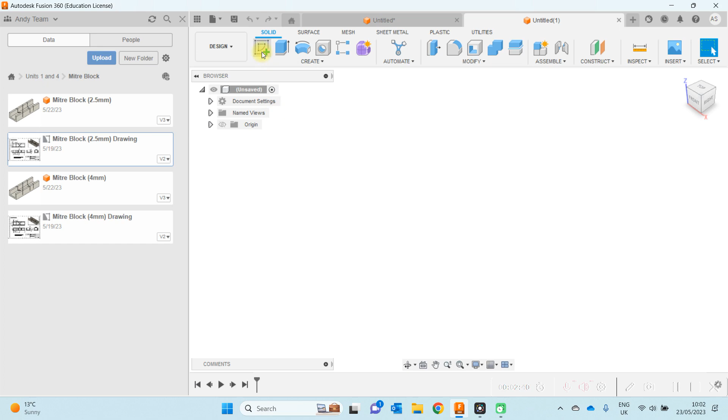So the very first step then is to create a sketch of the front face of our mitre block. We need to choose a plane to sketch on. With reference to the drawing, I know that the front face needs to be 300 millimeters long by 60 millimeters deep. So I'm going to sketch that now.

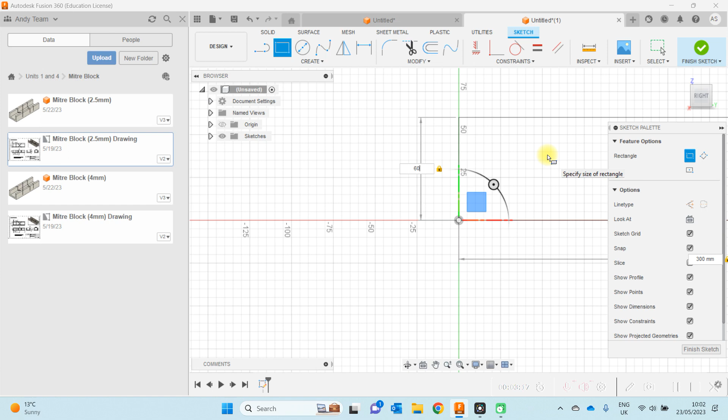As you'll notice, the dimension at the bottom, or the length, is currently highlighted, so that means I can edit that. I'm going to type 300 for my length, hit the tab key, and type 60 millimeters for my height. Now when I hit enter, that sketch is fixed in space.

I'm going to click Finish Sketch, and I'm also going to click the Fit to Screen icon down at the bottom here.

Next, I need to extrude the block through its depth. Once again, with reference to the drawing, I know that the depth of the mitre block is 95 millimeters, so I'm going to use the Extrude tool.

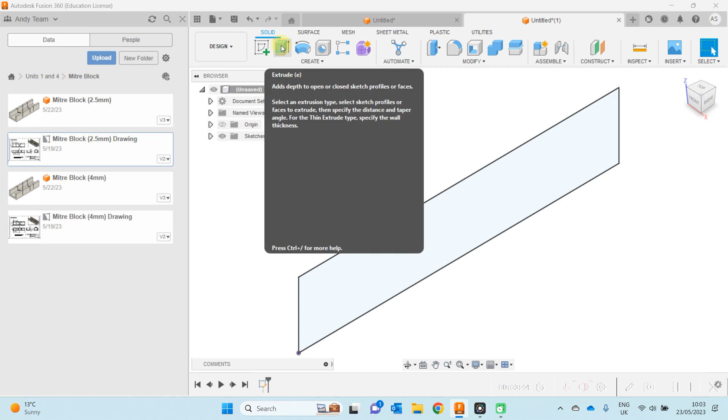The outline of my sketch is highlighted, but if it wasn't highlighted, then all I need to do is click that sketch, making sure that the full area has been highlighted. Once again, my measurement is highlighted here. I can either drag my arrow, or I can simply type the value, 95 millimeters, into the box.

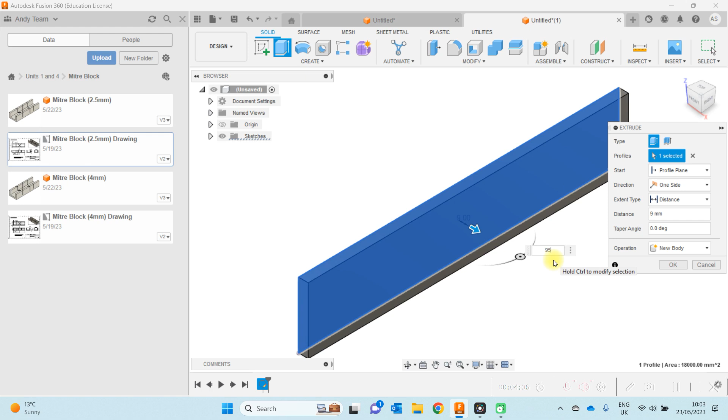Now I have the general outline for my mitre block. I'm creating a new body, and I click OK. Once again, let's fit that to screen, and we have the outside geometry for our mitre block.

Now, as with anything in CAD, there's always more than one way to produce the same component, so I'm demonstrating how I would approach this task. If you're working from the drawing, you may well be able to approach this in a different way and still achieve the same outcome. So within our mitre block, we have a cutout, and the cutout comes out of the centre of the block like so.

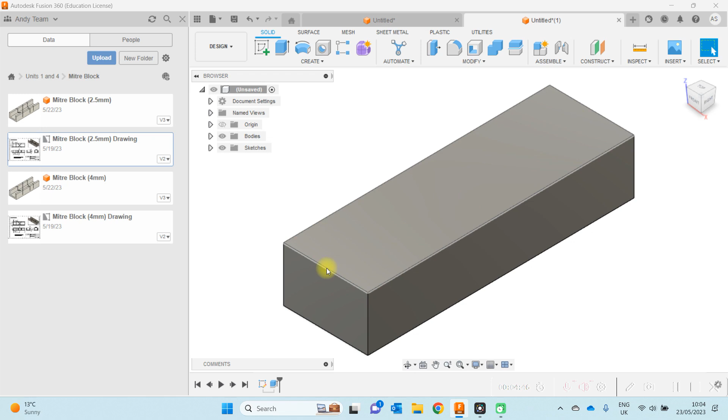So what I'm going to do to create this is I'm going to sketch on the top face this time. I'm going to specify Create Sketch, and select the top face of my geometry. Notice that the geometry has been reorientated in order for me to sketch on that plane. So I'm also going to fit to screen once again.

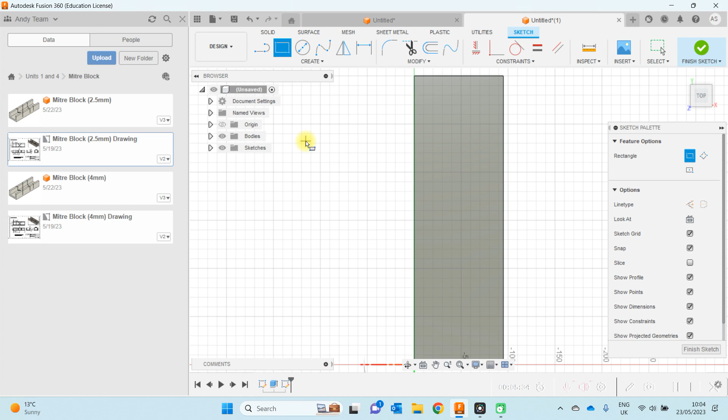So I'm going to create a rectangular sketch on the top surface, but at this point I'm not going to specify any dimensions. I'm going to click my first point, and I'm going to click my second point. If you need to pan the drawing, you can do so, and hitting Escape will take you back to defining the second corner of your rectangle.

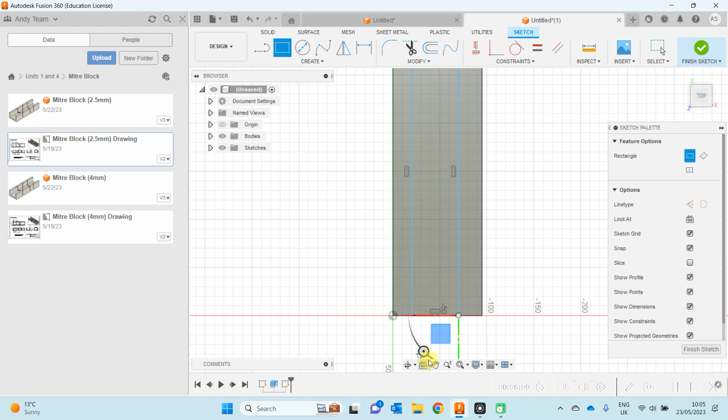So at this moment in time, this rectangle is underdefined. We need to specify some dimensions to fix this in space. Fusion knows that we've snapped to this edge here, and to this edge here, but it doesn't know the width or the position of the rectangle.

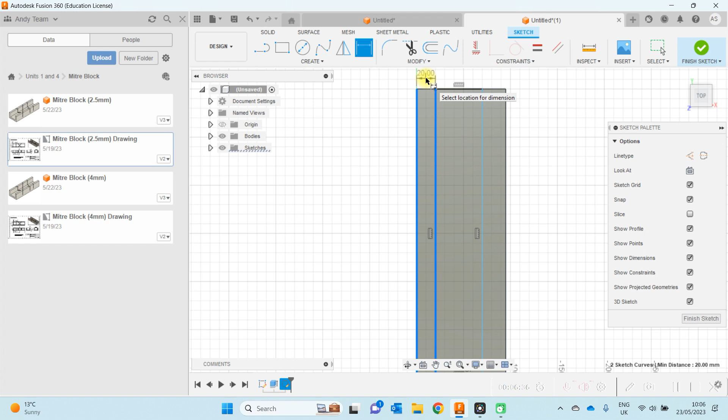Hitting Escape again to move out of the Pan tool, I'm going to select my Dimension tool. With reference to the drawing again, we know that the distance from the rectangle edge here to the outside of the block is 15 millimeters. So I'm going to place my dimension, and once I left click to place my dimension, I have the option to type in the value of that dimension, and you'll notice that the sketch is updated accordingly.

Now I'm going to do exactly the same on the other side. I've selected my dimension tool, selected the edge of the rectangle, selected the outside of the block, positioned my dimension, and typed the value of 15. So now we have a fully defined rectangle in order to perform our cut operation.

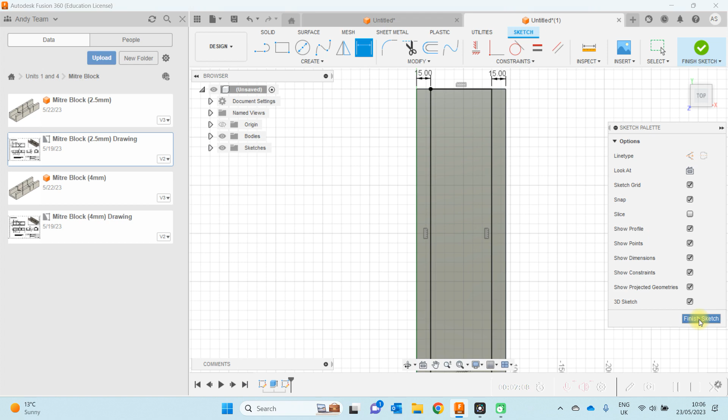I'm going to finish the sketch, and rotate or orbit my object slightly so I can visually see the rectangle on the top face. Then I'm going to select my extrude option once again, and select the sketch that I've just produced.

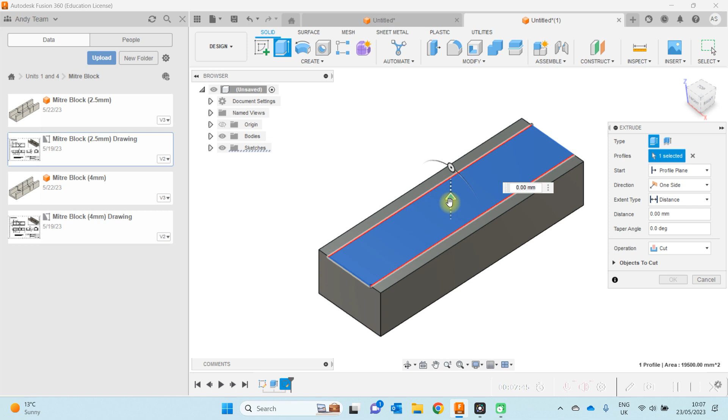The important point to note here is that this extrude function needs to be a cut, so it needs to cut into the object and remove material from our block. So rather than new body, I'm going to specify cut. I also need to make sure that rather than the arrow pointing upwards, it points downwards, so I'll drag down into my object. You can see from the preview that this is going to remove material from the block.

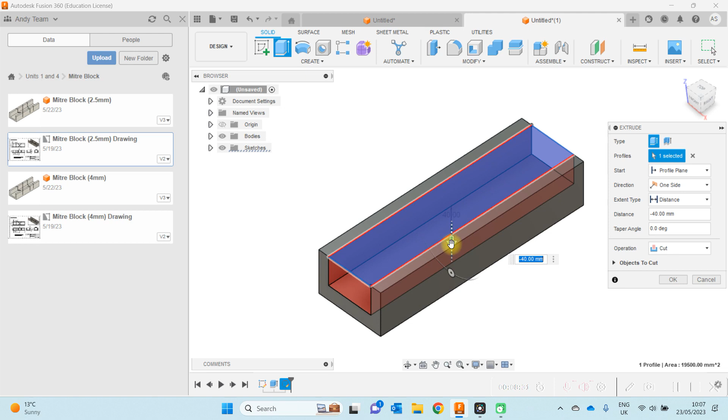I still need to specify my depth. With reference to my drawing, I can see that this depth needs to be 40 millimeters. But notice there's a minus sign at the start of this dimension - if the arrow was pointing upwards, the dimension is positive, but downwards is negative. So when we specify this dimension, we need to put minus 40 rather than just 40.

Now when we click OK, we can see that our new object has that section of material removed. The next stage is to include our cutouts, and the cutouts are where a saw would pass through in order to achieve 90-degree and 45-degree cuts.

There's a number of different ways to achieve this, but I'm going to perform a cut on my top surface. So I'm going to specify sketch, select one of either of the two top surfaces - it won't matter which - and fit to screen once again.

Now we're just going to do one of these cuts at a time. There's 3 cuts in total, but we'll do one at a time so we can practice the operation. I'm going to start with the insert for a 90-degree cut, as that's the most straightforward. So I'm going to select my rectangle tool again, and pick an arbitrary start point and an arbitrary end point.

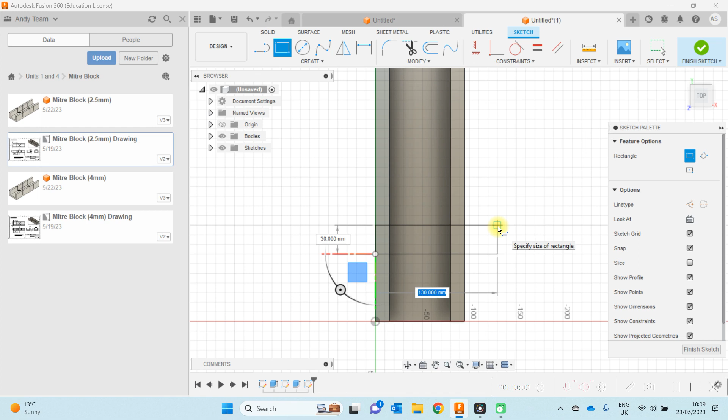At the moment the position of this rectangle isn't defined, but I know from my drawing that the first edge of the cutout, which is going to receive the saw, is positioned 73 millimeters from this leading edge. So my first dimension goes from the corner of the block to the corner of the rectangle. At present that is specified as 30 mil, but I need that to be 73 millimeters.

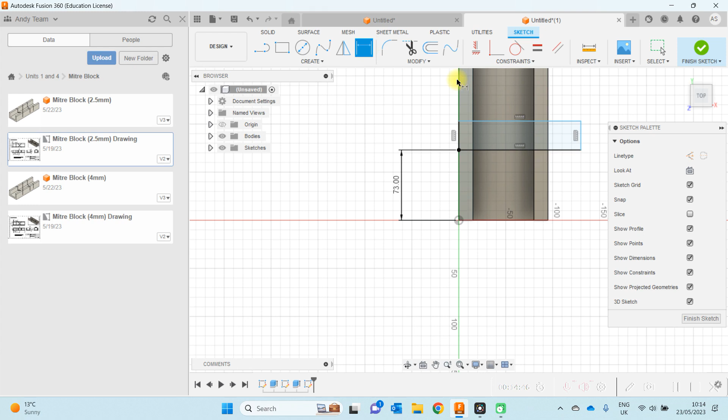I also know that the thickness of the slot is 2 millimeters. So once again I use my dimension tool, select the first edge of the rectangle, the second edge of the rectangle, place my dimension, and change that to 2 millimeters. Now if I wanted, I could specify the position of this corner of the rectangle or the overall length of the rectangle, but as I'm going to use this to cut through the part, there isn't any benefit in doing that at this stage - you'll see why as we continue this video.

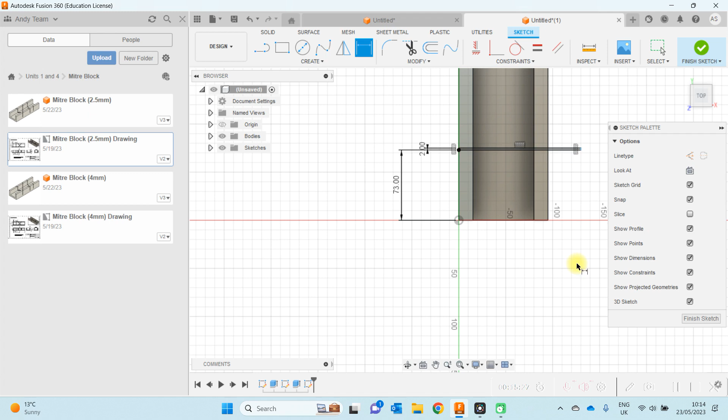So let's finish our sketch. Let's orbit this object so we can see the top surface and the rectangle we're going to use for cutting the object. We're going to extrude, and select the rectangle for cutting. Notice here that part of the rectangle is being cut off because it's intersected by the edge of our block, so we need to make sure we select both of those rectangles.

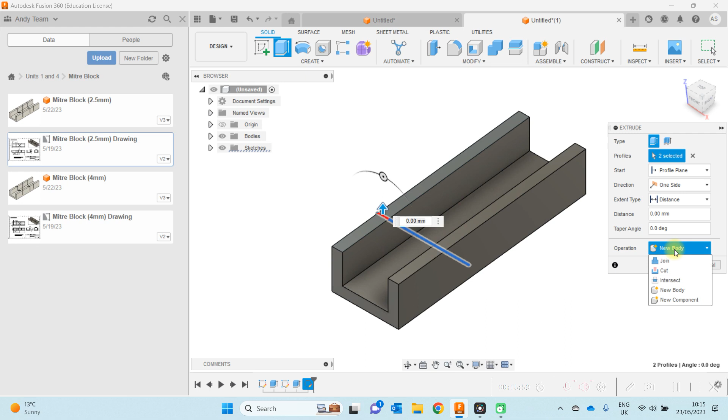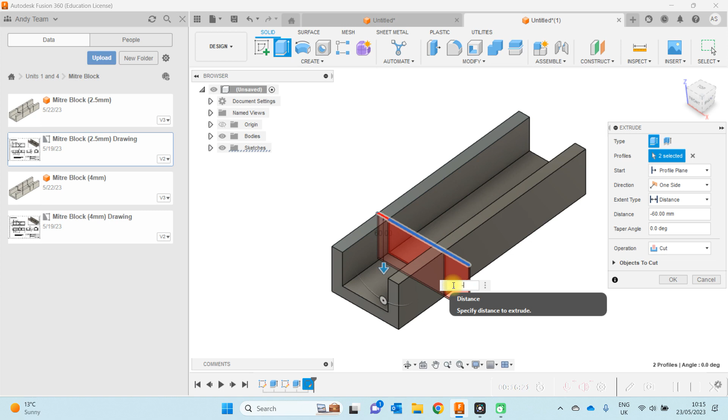We know we're using this for a cut operation, so we change from new body to cut. We're also going to drag our arrow downwards so we get a visual representation of how that cut's going to be performed. Now I know from the drawing that the cut depth needs to be 47 millimeters, but notice once again that we have a minus because we're cutting into the object. So I'm going to change that to minus 47, and click OK.

And now if we orbit that object, we can see that the cut is the full way through the block, as well as leaving an impression of 2 millimeters on the bottom surface. We have 2 more cuts to perform.

We need a 45-degree cut that goes across the block in this direction, and a 45-degree cut that goes across the block in this direction, and those 2 cuts are going to cross in the very center of this face.

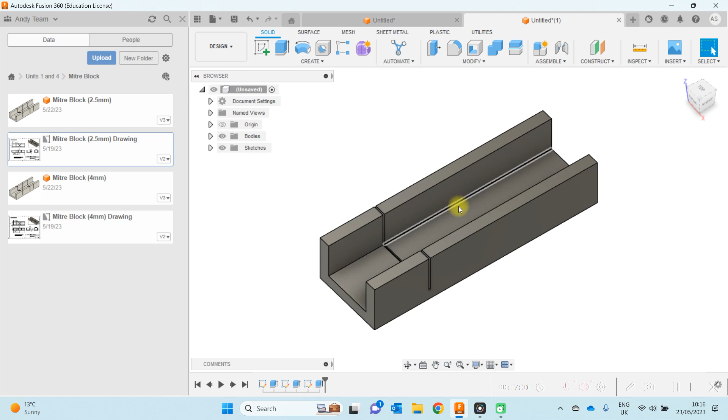Once again there's lots of different ways to do this, but I'm going to choose to sketch on the top face once again. So create sketch - we could either pick this top face here or this top face here. I'm going to pick this top face, then fit to screen.

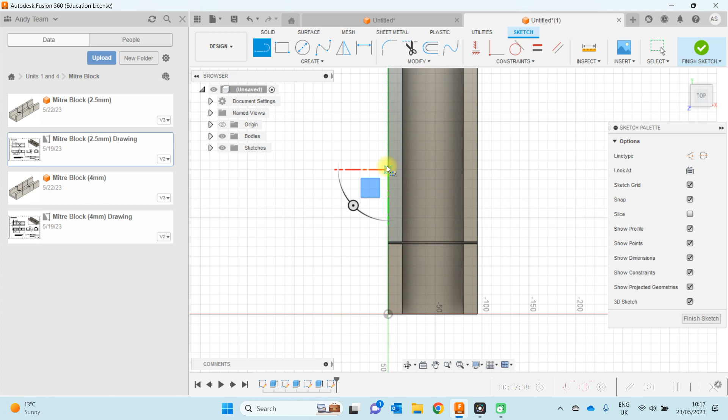Now we can go ahead and draw our 45-degree cut. For this cut, I'm going to use the line tool, placing my first point and then my second point. As we do this, we notice we have a length specified, in this instance 150 mm. If I tab, we also get an angle. We could work out exactly what angle is needed for 45 degrees, or dimension it afterwards. So let's draw the line, and again I'll draw it oversized.

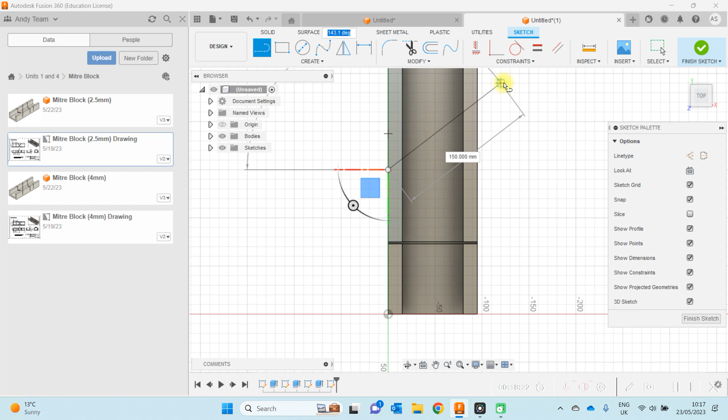I'm going to hit escape to come out of the line tool, and add a dimension to specify that angle. I can choose the edge of the block and the line, and we know this needs to be 45 degrees. So let's place our dimension, 45, and enter.

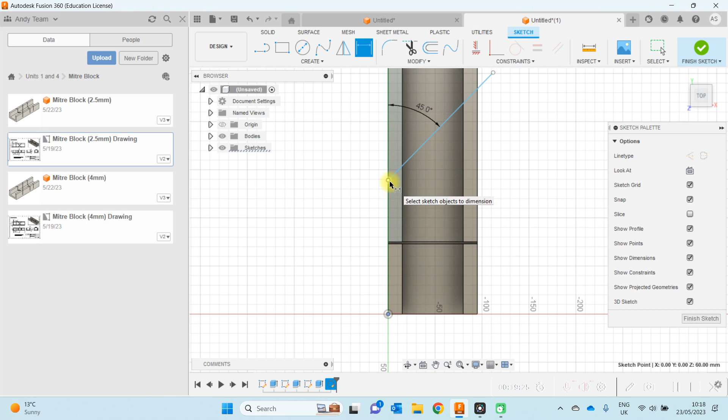The other dimension we know from the drawing is that the start of this cutout needs to be 120 mm from the leading edge of our mitre block. So let's add that dimension, going from the corner of the block to the line, at 120 mm. That first line of the cutout is now fully defined.

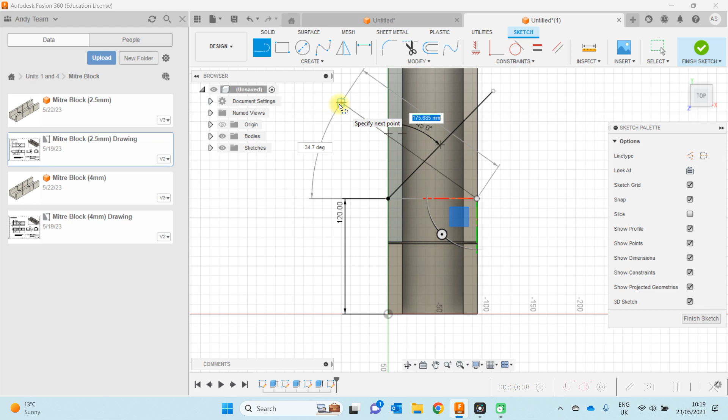To speed things along, I'm going to include the second cutout, which is at 45 degrees in the opposite direction across the block, with the starting point in exactly the same position. The reason is that these two cutouts need to intersect at the center of the block. So I'll take my second line, starting at the same position as the previous line. We can draw it at any angle, but since the dimension shows as a positive angle, I'll tab across and change it to 45, locking that dimension in.

Now, to create our cutouts in these two directions, we again need to specify that the thickness of this slot is 2 mm. But note that the 2 mm dimension needs to be offset at the 45-degree angle.

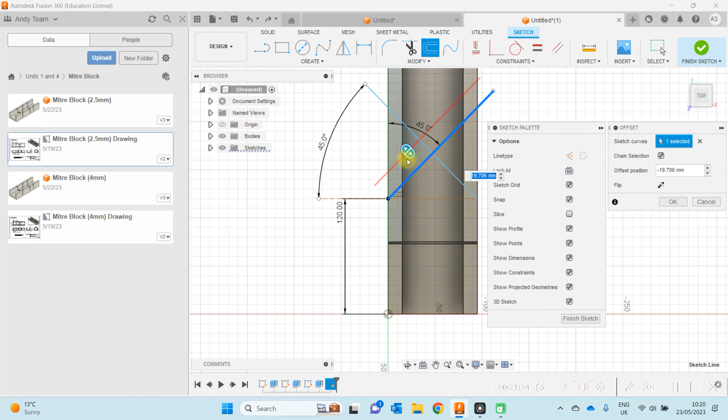The easiest way to do this is using an offset function. If we select offset and then select the first line, we can offset the line we produced by any given distance. I'll drag it in this direction, since I know 120 mm is the start of my slot and the slot needs to go 2 mm from that point. I'll change that to 2 and hit enter.

I'm going to repeat exactly the same for the other line, clicking here and setting 2 mm like so. Now we need to be careful here because we don't have closed sketches—we have two lines, but those sketches aren't closed. So we need to close each of those off to form an enclosed chain or rectangle, which we can then use to cut into our block.

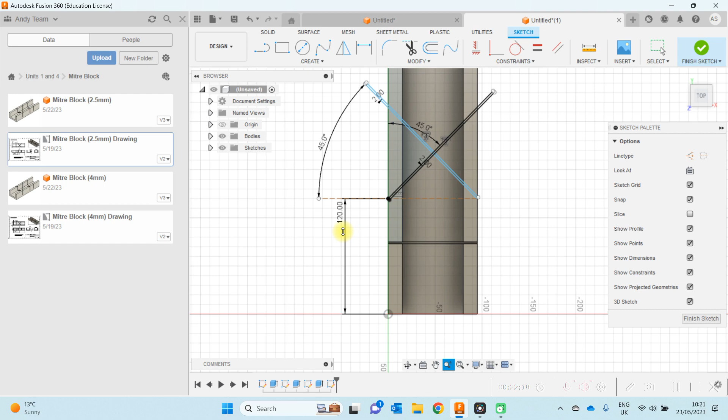I'm going to zoom in and move fairly close so we can see what's happening here. I'll pan to this edge first, select my line tool, and connect the start and end of my rectangle. Then I'll hit escape and pan to the other side.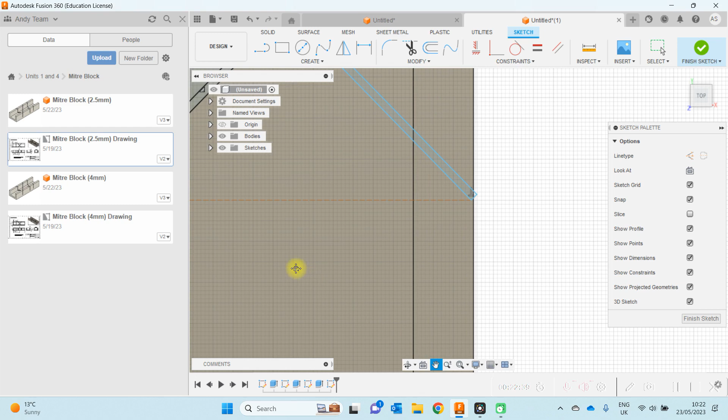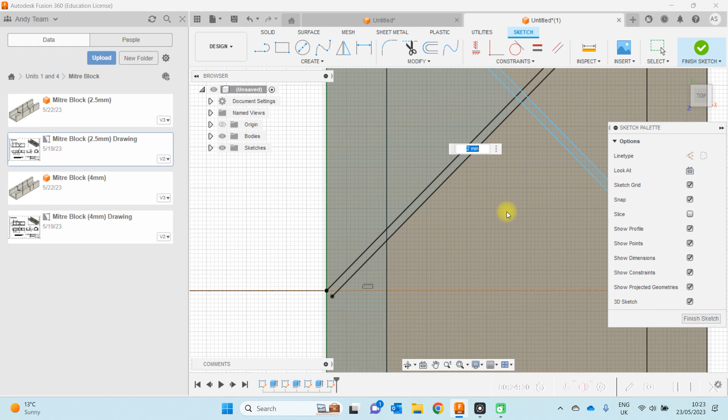It appears to have offset in the wrong direction. This isn't a huge problem because we can edit this sketch. If we find the dimension and double click on it, we need to change it from 2 mm to -2. We can see the direction was wrong, and when we change the dimension, the sketch updates accordingly.

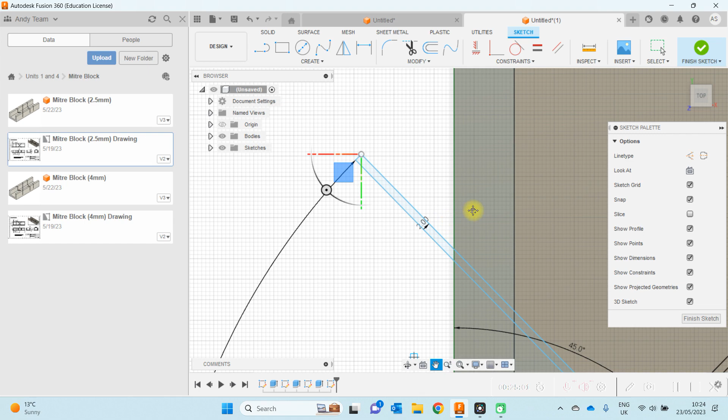Let's continue with the sketch and close this profile. I'll pan to the top and close this profile as well. Once again, it doesn't matter that these rectangles are oversized, because we're using them to perform a cut operation rather than a join operation.

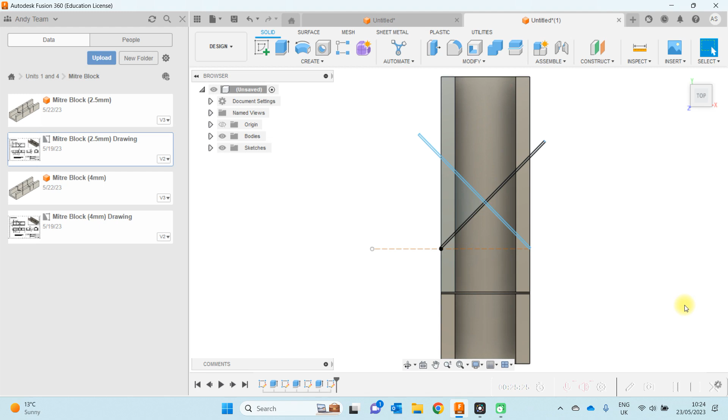Okay, so I'm now satisfied that we have our two rectangles that need to be used to cut into the block, and I'm satisfied that they are both closed profiles. So I'm going to click Finish, and I'm going to do Extrude Cut. Now you could cut each of these individually, the first slot and then the second, but I'm actually going to do all of this at once. I need to make sure that all of the profile is selected for both of these cutouts. So I need to go around and carefully select all of the parts I'm going to use for cutting, like so. I'm also going to select this part here, as I'm not quite sure where that rectangle intersects with the block. Okay, as before, let's change this to a cut operation.

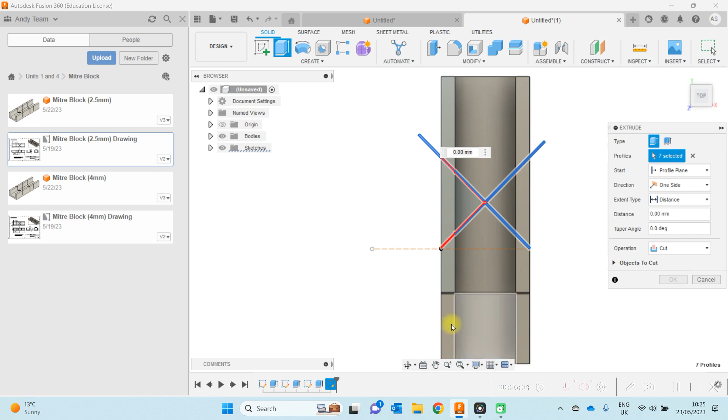Let's orbit so we can get a visual representation, and let's drag this down through our block. Now the depth of this is the same as the previous cut, which was 47 millimeters. But once again, taking note that we have a minus here, minus 47 millimeters. And there we can see the visual representation of our cut. I'm going to click OK.

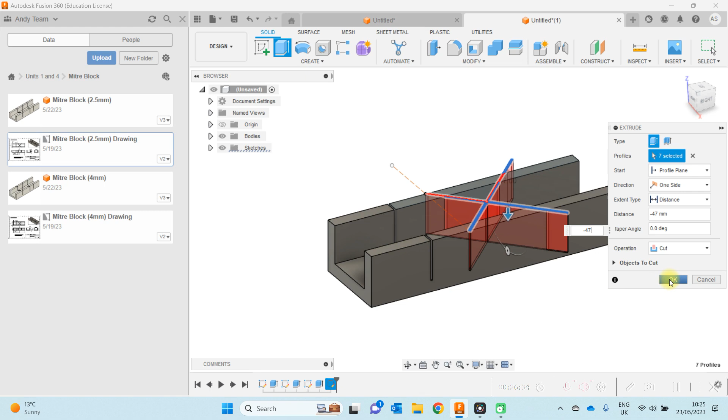Now, once again, we can see that those cutouts go right the way through the block. We can see that it's left the 2 millimeter indentation on the bottom surface. Therefore, I'm happy that we've created all parts of that mitre block as expected.

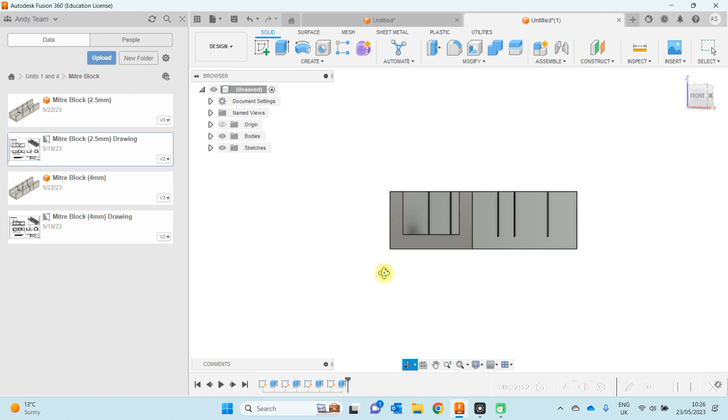Now, the final operation specified on our drawing is that we need to shell this object to 4 millimeters. If you think of an injection molded component, it's a very thin layer of plastic. So at the moment, we have a solid block of plastic, which isn't necessary. So let's perform a shell function, and we're going to shell from the bottom surface. This means the bottom surface is going to be taken away, and we're going to create a shell out of the rest of the geometry.

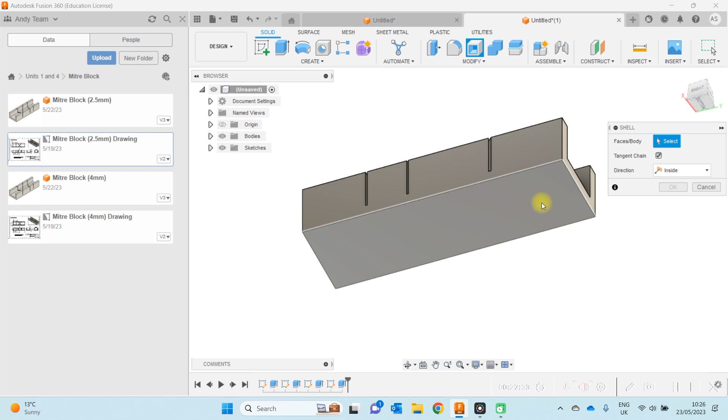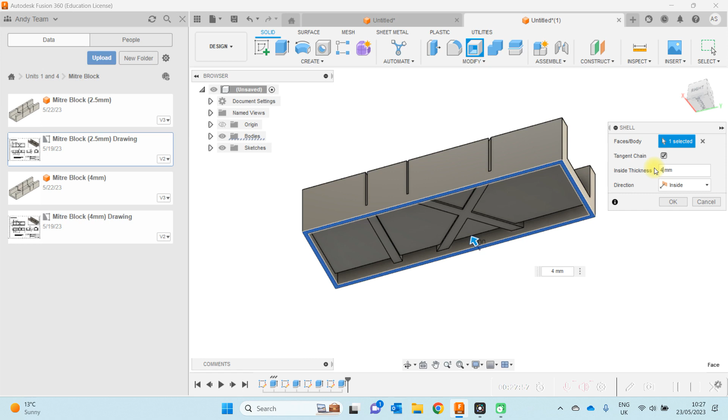So up here we have our shell function. It's going to ask us which face or body we want to shell, so we need to make sure we pick the bottom surface, like so. And you have the option to shell inside or outside. We're going to specify inside because we want to keep the outside surface and cut material out from the inside. We're going to shell this to a thickness of 4 millimeters. We can see the preview there. That's exactly what we're looking for.

Making sure our cutouts still travel the full way through the object. Okay, and once we're happy, we can click OK. Now there we have the completed geometry for our mitre block.

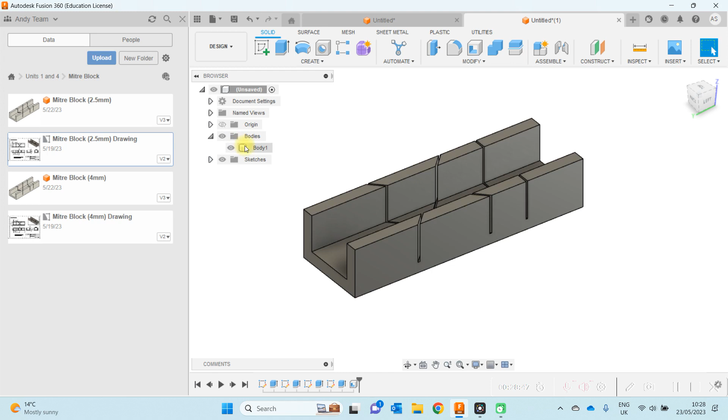I mentioned at the start of the video we were going to inspect this and assign some materials to it. So the first thing we're going to do is inspect our mitre block to determine the overall volume of material used to produce this component. If we expand our bodies menu, we only have one body, and that's our mitre block. If we right click, we have an option here, Properties. And under the list of properties, we have the volume of our mitre block, 3.879 times 10 to the 5.

All that means is that our decimal place moves 5 to the right. So the overall volume of this block is 387900 cubic millimeters, so effectively 388,000 cubic millimeters. We could change the units of this if we wished, but at least it gives us an idea of how much material makes up that object.

But what we're more interested in is the overall mass of this object. Now, at the moment, we don't know what material is specified for our mitre block. So once again, we need to select the body and go to physical material.

Now, for this particular mitre block, we're going to specify the material as ABS polymer, which is a type of rigid plastic. So if we go to our plastics list, you'll notice that the very first plastic there is ABS plastic. So if we drag the ABS plastic and drop it onto our object, we notice that the physical appearance of our block has now changed. We've assigned the material to that particular object.

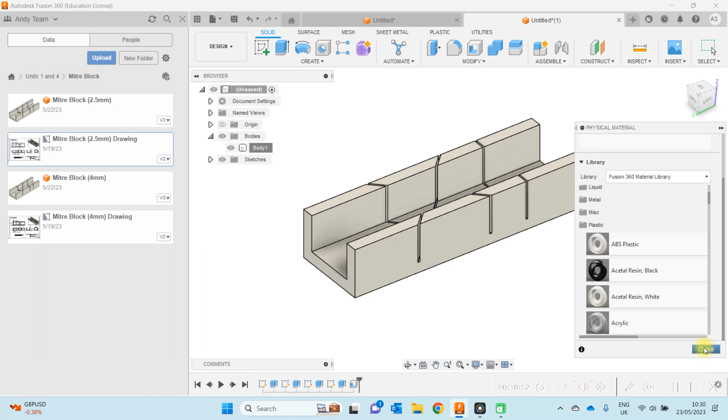Let's close our menu. And once again, let's right click and click on Properties. And what we see this time is our volume is unchanged, as you would expect, but we also have a mass specified, 411.19 grams. So the overall mass of our ABS plastic mitre block is 411.2 grams to the nearest one decimal place.

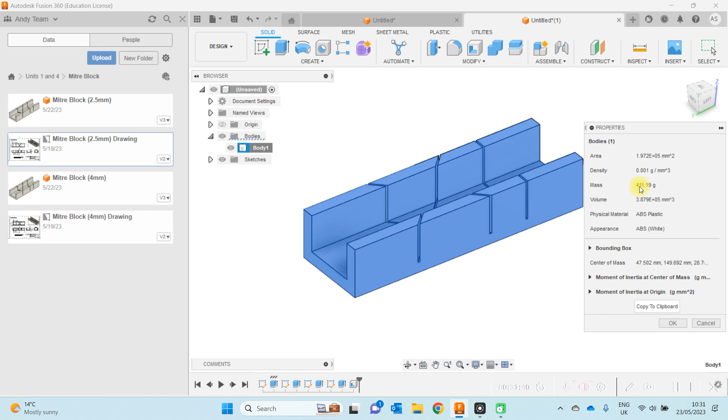So I hope you found this video useful. We've seen how we can perform various operations using Fusion 360, first of all to create a solid block, and how to perform additional operations such as extrude cut, as well as applying dimensions, ensuring that the dimensions and positions of all of our features are correct. We've also looked at how we can inspect the component to determine things such as volume and mass, as well as how to assign specific materials to a given component in Fusion 360. Thanks for listening.